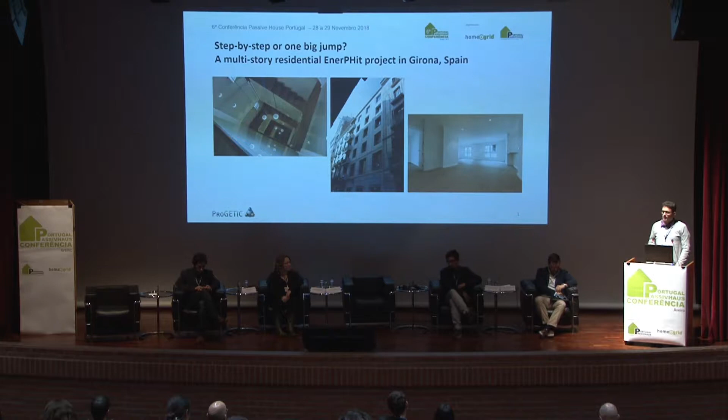It's great to be in Portugal and share experiences about Passivhaus and low energy building, and it's really good to see. I am a Passivhaus consultant living and working in Barcelona.

I set up an engineering company there 8 years ago, and people said to me, 'You're crazy. You want to start working in the construction sector in the middle of a huge economic crisis in the worst sector of the economy possible, and you want to do Passivhaus?' People said, 'You're crazy.' But we kept working, and we've moved forwards, and I would say 85% of our work is related to Passivhaus or low energy buildings.

So it can be done. It's like Germán said, there's no reason not to do this. It can be done, and it's economically viable, and it's technically viable.

So I just wanted to present a small project that we were involved with as Passivhaus consultants, which was an EnerPHit retrofit project in Girona in Spain, just north of Barcelona.

A little bit along the lines of Germán's question: in Spain, why would you bother with Passivhaus? You know, it's all sunshine, it's basically quite warm, there's beaches. You could probably say the same about Portugal. You've got a temperate maritime climate. Why bother with all of this?

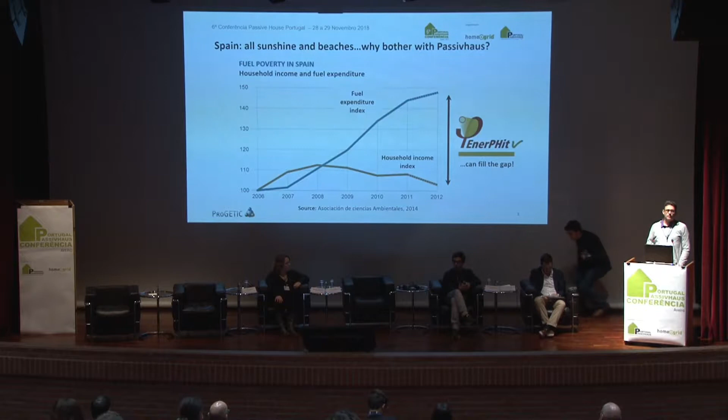Well, there's lots of reasons to bother with Passivhaus, but one of these is, in Spain for example, since the economic crisis, average household income has decreased, and fuel expenditure has increased. So that's giving rise to a situation of fuel poverty, which is a feature in a lot of European countries. EnerPHit can help fill that gap, because as people's net earnings decrease and their energy expenditure goes up, savings have to be made, and EnerPHit can help with that.

Ironically in Spain, some of the highest levels of fuel poverty are in the hottest parts of the country. That's Andalusia: 16.58% of families can't keep the right temperature in their home. In Catalonia, where the project is, it's at 9%. And then the Canary Islands, which is the happiest climate you could probably find, there's still 15% of families who can't keep their homes at the correct temperature.

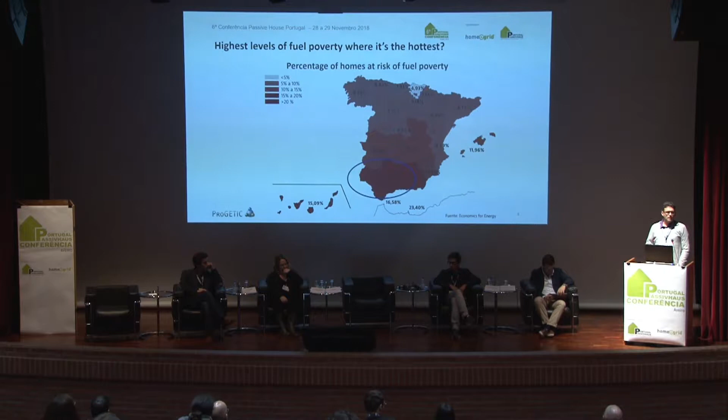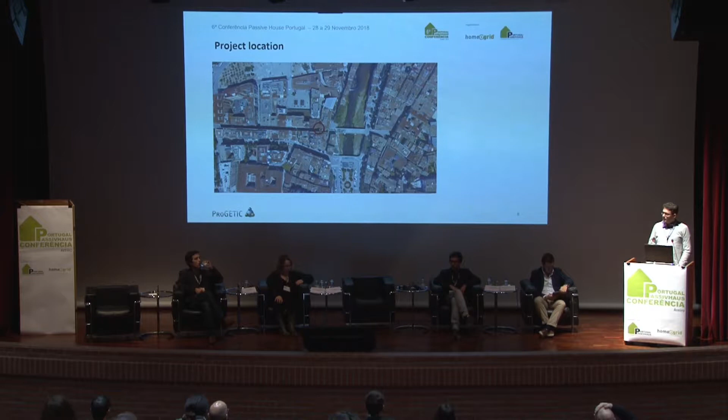So this is one of the many reasons, I think, for doing a proper, deep energy retrofit of existing buildings with Passivhaus. The project I'm going to present is not social housing at all, it's more high-end flats, but it's located in Girona, in the northeast of Spain, about 60 kilometers inland, and the project itself is located in the city center of the old town.

So just to run through the project: it was certified as Passivhaus EnerPHit with the demand method as a pilot project. The original building was built in 1978, about 1,000 square meters of gross floor area. The specific build cost of the whole job was around 1,185 euros per square meter, so not exactly cheap.

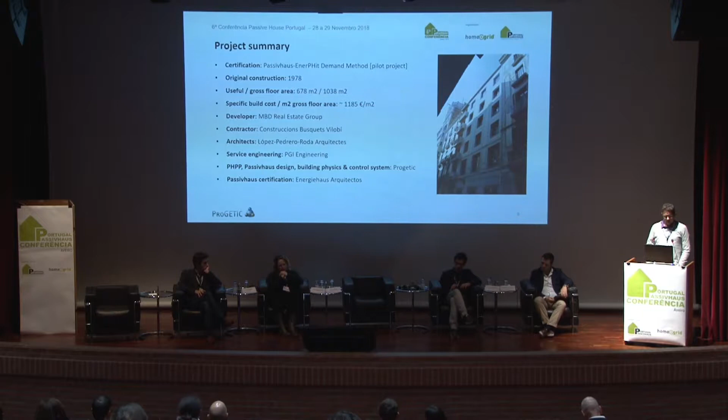The developer is a local developer who decided to opt for Passivhaus and took the step to do this project. The architects were based in Barcelona, service engineering by PGI Engineering. We were responsible for the PHPP Passivhaus design and building physics and the control system, and the certification was done by Energiehaus Arquitectos. The build took a year, began in August 2016, and was finished in 2017.

So I'll just run through some of the details of the project. Before that, just briefly: EnerPHit offers us two different ways to get to certification. One is the energy demand method, and the other is the component method.

I'm sure a lot of you already know this, but to summarize: the energy demand method is very similar to Passivhaus Classic, so it's a performance-based certification where you have to meet the limiting space heating and cooling demands. It's more demanding, and it's probably more advisable where you can use large amounts of insulation on an existing building without causing risk from moisture damage.

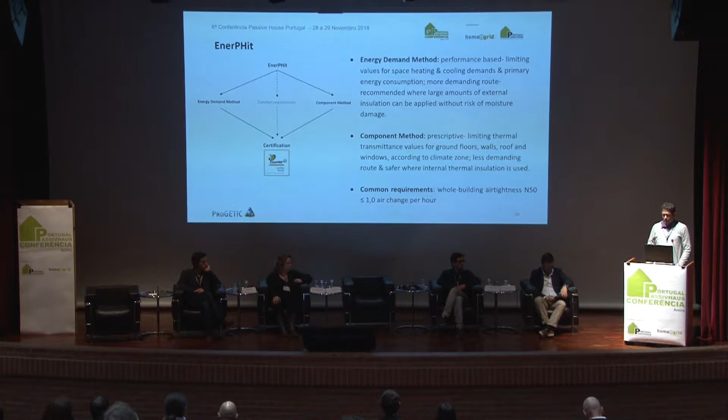If that's not possible, the component method is the alternative, where you have to meet limiting U values. It's less demanding, but it's also safer if you have to do an internal insulation system. And of course there's common requirements, which is the 1 air change per hour at 50 pascals, which needed to be met either way. So in this project we went via the energy demand method.

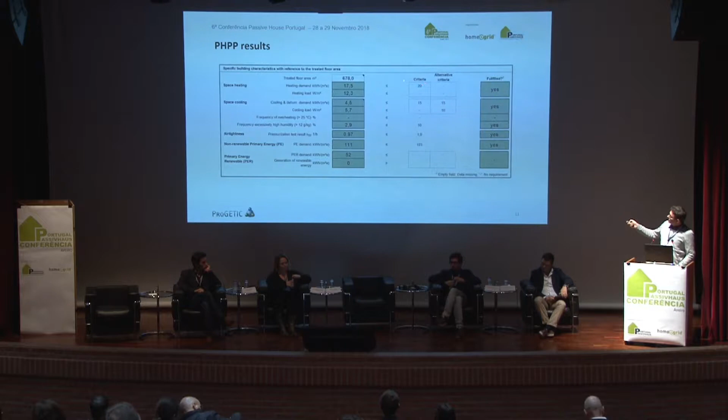These are the results of the PHPP. So for the Girona climate, we had a heating limiting demand of 20, cooling of 15, and the air tightness of 1.

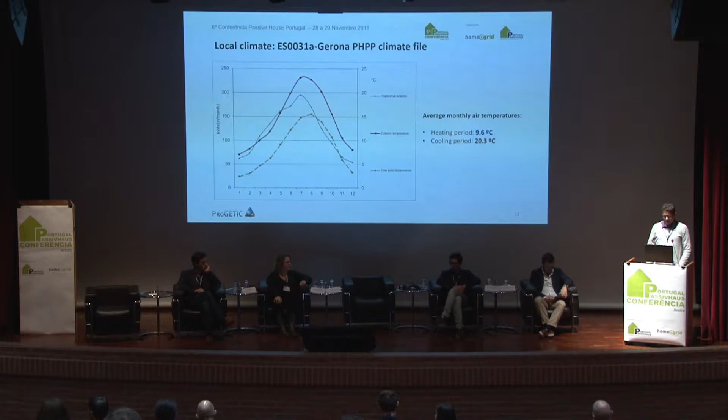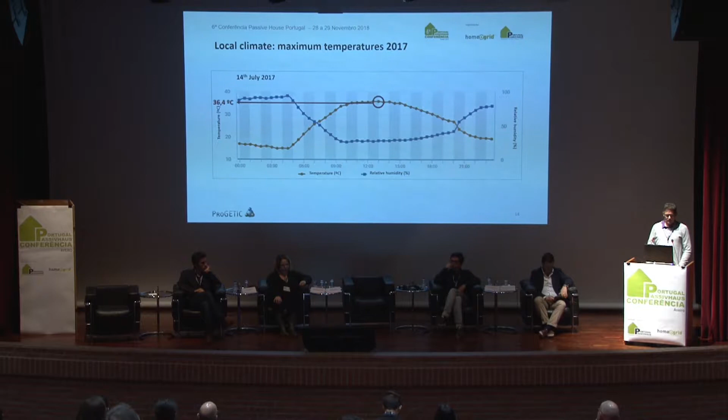If we look at the local climate, these are the average monthly temperatures. We've got about a 10-degree average during the heating period and around 20 degrees in summer. So on the average monthly data, it doesn't look too extreme. However, if we look at the absolute minimums and maximums, it does get quite cool - minus 8 in January 2017, and up to 36 degrees in July of last year. So it can get quite cool and quite warm.

Some information on the existing building. In the image on the left is the main facade that's south-facing. There's a load-bearing ceramic extruded brick wall of 29 centimeters with cement render on the outside and gypsum plaster on the inside.

The internal floors are terrazzo over concrete beam and block. And we couldn't insulate on the outside at all - that was not permitted by the local legislation.

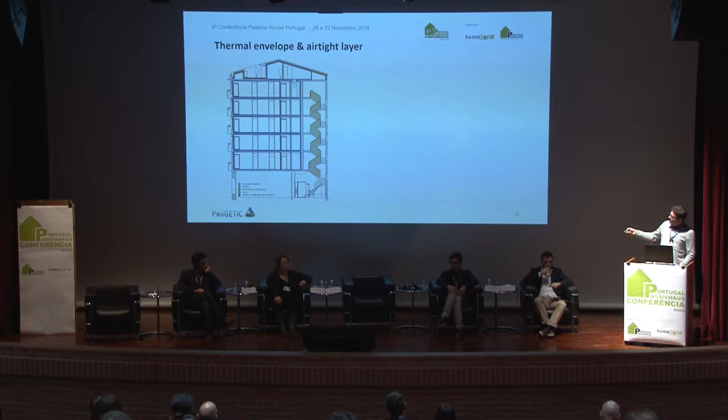So what were the initial proposals for the thermal envelope and airtight layer? Because there was a commercial premises on the ground floor - this is actually a bank - the stairwell was left out of the thermal envelope and airtight layer, and the thermal envelope was therefore done on a per floor basis. You can see on this floor plan the thermal envelope line.

Obviously, it's preferable to do the whole building if you can. In our case, we couldn't because the commercial premises was not part of the building itself.

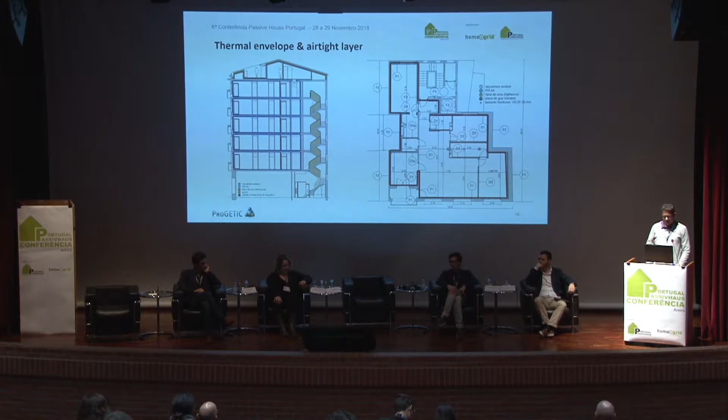What did we do? We applied an internal insulation system which needed to get the U-value from 1.45 down to 0.19. We did that using 80 mil of PIR insulation boards, which were dab and dot bonded to the existing wall, with 48 mil of mineral wool insulation between metal studs and gypsum plasterboard.

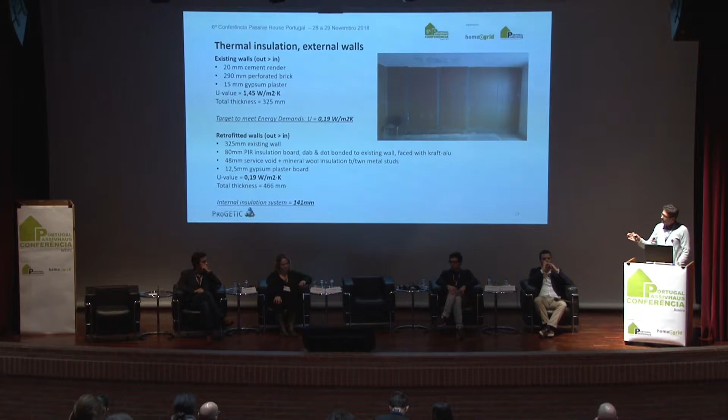This was not what we as consultants wanted to do originally, but the worry of the developer was to minimize the amount of floor space that was going to be lost with the internal insulation system. So we had to go towards very low thermal conductivity insulation like PIR boards, which personally is not a kind of material I would prefer to work with, but this was the solution we ended up working with. It took 14 centimeters to do the whole internal insulation system.

On the roof, it was newly built with a timber structure using 60 mil of wood fiber insulation with a radiant barrier, which you can see here, to reduce heat gains in summer. Clay tiles, 140 mil of blown wood fiber insulation, on top of 12 centimeters of cross-laminated timber. So we had a well-insulated roof to keep the heat out in summer and in winter as well.

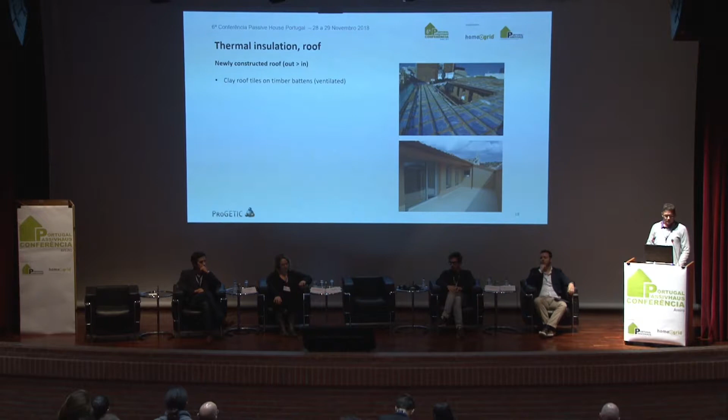Some of the thermal bridge detailing. Obviously one of the difficulties in retrofit, if you can't insulate on the outside of the building, is how to resolve intermediate floor and wall junctions. They can't be resolved perfectly thermally, of course, but what we decided to do was...

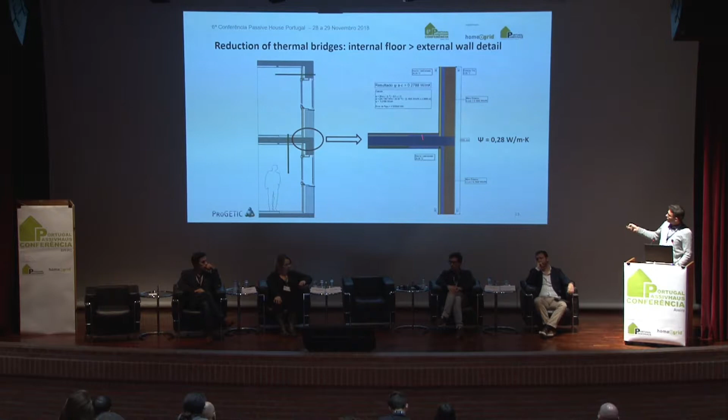...cut out 1.5 meters of the floor and insert insulation on the floor and on the ceiling. That way, the psi value is still quite high, but we managed to bring the minimum surface temperatures up to avoid problems with condensation and mold growth.

As you can see here, this purple material is the insulation, and it brings the minimum temperature up to about 16.5 degrees - quite a way above the 13.2 degrees, which is the limit for mold growth. So you can see some images of that detail here.

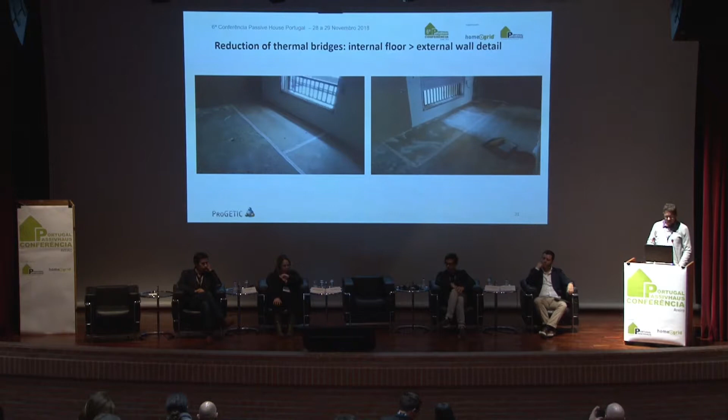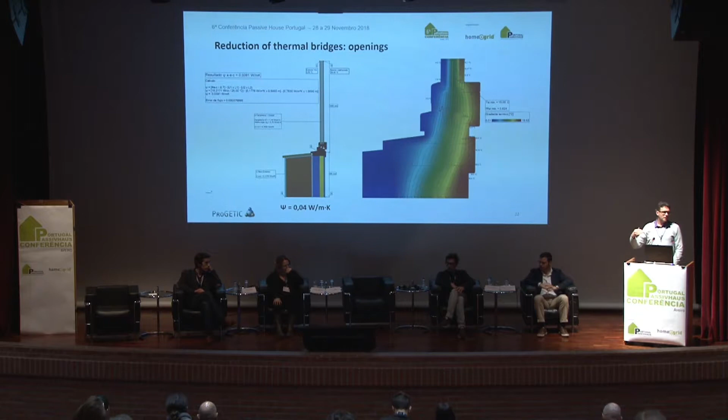The floors were cut out, and all of the external walls had these strips of insulation inserted. For windows, we did a detail of fixing the windows in the insulation layer, on the internal insulation layer, which is a good solution for warmer climates too, because if the window itself is on the inside of the opening, you get more shading from the opening itself.

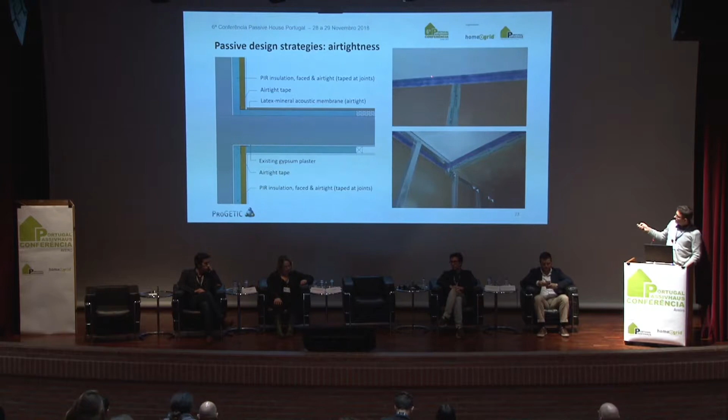Air tightness: we used the PIR boards for the airtight layer on the walls. They were taped to the existing plaster on the ceilings, and taped between boards. On the floors, we taped them to an acoustic membrane, which was already in the design anyway. So that's what we used for air tightness - the PIR boards, existing plaster, and a latex membrane on the floors.

The air tightness gave us a lot of headaches. It was a really good learning experience. One example of how not to do it is what you can see here - this was a cable that was going out to the motors for the blinds. Of course, the subcontractor who came to install these was not in any of the original meetings, so he didn't know what air tightness was all about.

He didn't know anything about what you needed to avoid, so he just drilled a hole through these things and stuck his cable in and left, happy with the job done - until we came to do the blower door test, and of course we saw all these holes. They had to be taped up, and you can never get a really good tape seal like that. These are things you learn doing all of these projects.

One other problem we found with the air tightness was that one of the flats was sold and the client wanted to move one of the bathrooms. So the drain pipes were then moved.

We couldn't see when we did the final blower door test if that had been well sealed or not - these are all things you learn doing these projects. The windows were taped from the PIR boards across the pre-frame onto the fixed frame.

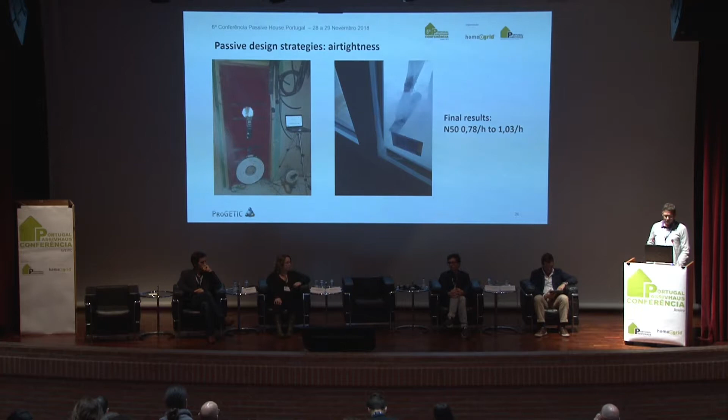Blower door test gave us results of between 0.78 and 1.03. On the lowest floor, we actually had to ring up the bank on the ground floor and ask if they could let us into the vault where they keep all the gold and money, because we had to see if there was a leak. We had a result of 1.2, and there was a leak which we had to inspect. We didn't manage to take anything with us from the vault, but we did manage to get the final result down to 1. So that was air tightness.

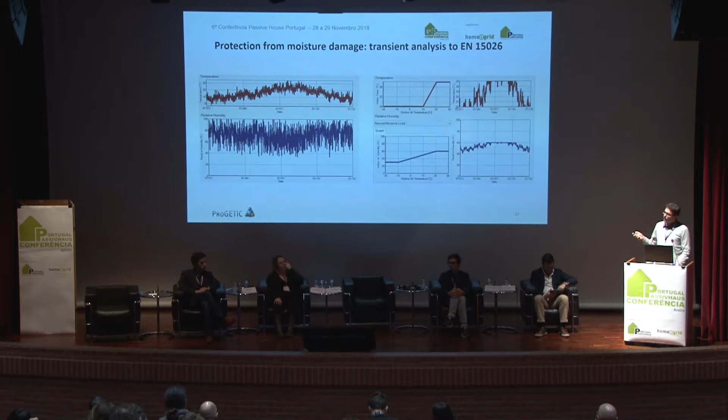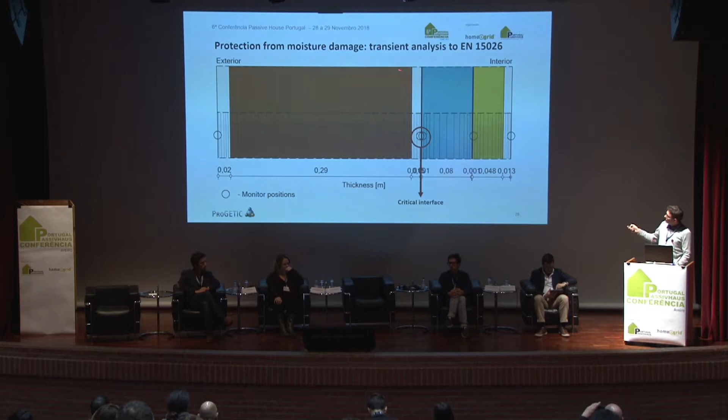Another thing we looked at in the design phase was transient dynamic hygrothermal modeling, to make sure we didn't have a risk of moisture and mold growth with the internal insulation system. Using the WUFI calculation program, we ran simulations of the internal insulation system, looking at the relative humidity at the critical interfaces - cement plaster, ceramic brick, gypsum plaster, insulation, and plasterboard. Running these simulations, we could see the relative humidity over a 10-year period at the critical interface, which gave us an indication that the internal insulation system would be safe.

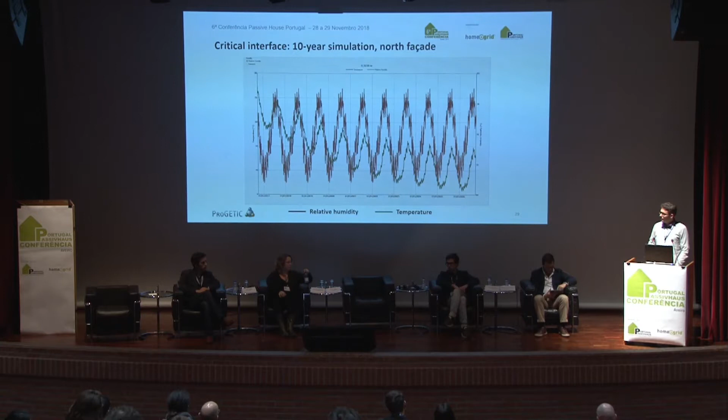It's very important in these cases - if you don't have an external render to keep rain and driving rain out, you have to be much more careful with what kind of insulation you use on the inside. Go for a vapor open strategy, and probably go for the component method rather than the demand method.

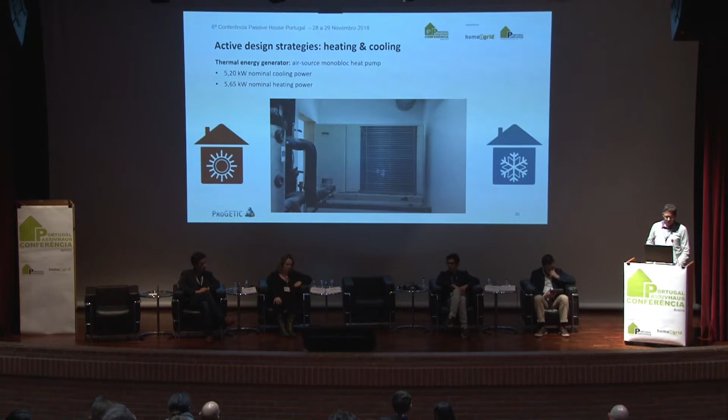In terms of active systems, we had a per-flat heating and cooling system which included the following: a thermal generator, an air source heat pump with about 5 kilowatts of heating and cooling power, feeding a post heater and cooler battery on the ventilation system, with insulated ventilation ducts taking warm or cool air into each room.

This was combined with radiant ceiling panels - we couldn't use underfloor heating because there wasn't enough floor space, and we couldn't use fan coils or split units because there wasn't enough space either. So the option we decided on was that most of the cooling and heating power is done by the battery, with the remaining power provided by the radiant ceiling panels.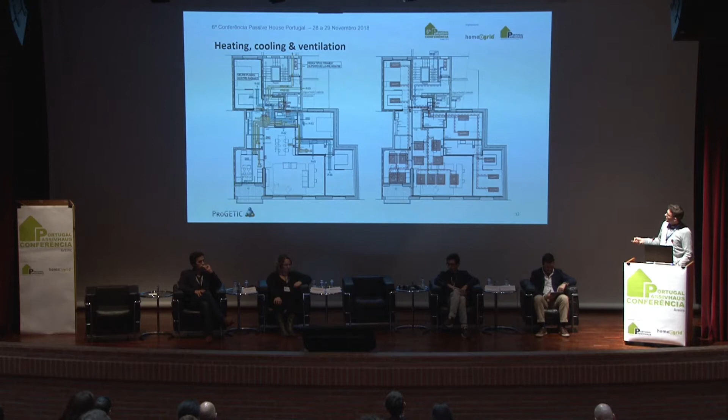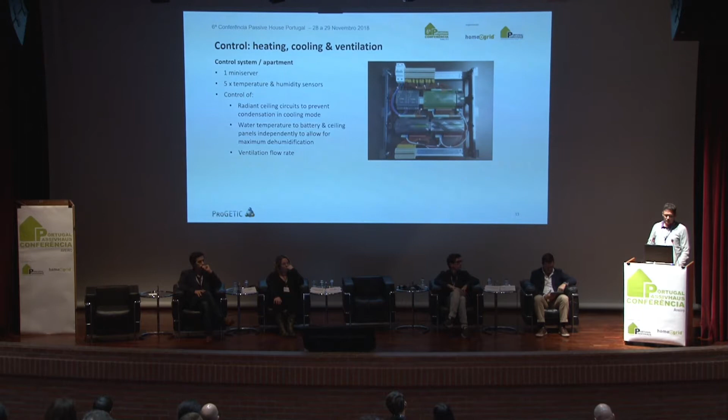All of that was controlled by a control system which includes a mini server and different temperature and humidity sensors in each room. That way we could differentiate between the temperature going to the radiant ceiling panels and to the heating and cooling battery, allowing us to dehumidify as needed in the summer and modify the ventilation flow rate. All of that controlled via a tablet on the wall or a mobile phone.

This is all very nice, it's all very sexy, it looks very cool, and it works very well. But of course, there were 2 people who bought one of the flats who were retired. When they saw all of these phone things and applications, they were like, we don't understand any of this, and they got quite upset.

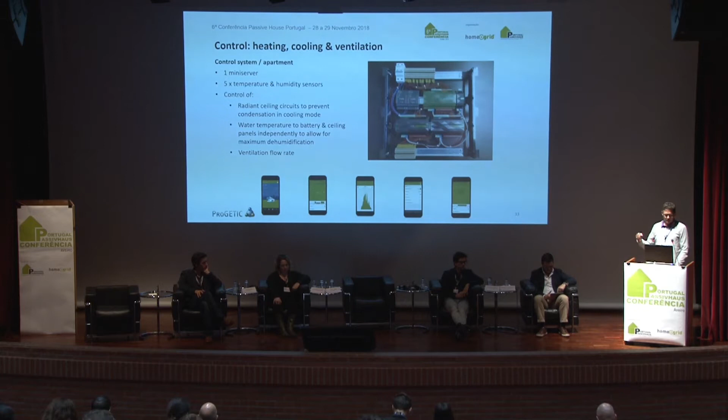So that's obviously one of the important lessons we learned from the project - keep it simple. You can use all of this, and these systems are very useful to monitor and do preventative maintenance on a system, but the interface can be different. You can interface just with a conventional thermostat and still use these systems, so it's as simple as possible for people. That's important because I think when people move into a passive house, if there are problems, they sometimes are more likely to point the finger at passive house. So the simpler it is, the better - and I think that's true in any kind of building, but especially in passive house.

Comments from a lot of the occupants is the silence is amazing because they're right in the city centre of Girona, so there's lots of noise from bars and restaurants. Silence is amazing, it's very comfortable. People are generally happy. There's been some difficulties in terms of people getting used to not having a big cooker hood - one couple forgot to turn on their cooker hood, so they started complaining about smells. All the normal things you'll find in any kind of project.

But I think one of the things we've learned is the handover needs to be good. There needs to be good information going to the users so that they know how to use the building and run the building.

So just to summarize some of the conclusions and the lessons learned - I think this applies everywhere.

Be clever and keep it simple. All of us who work in passive house, we love going into detail - lots of numbers and graphs and details. But the simpler it is, the better. And I think Germán summarized that really well in his presentation, and Lloyd was commenting along similar lines this morning.

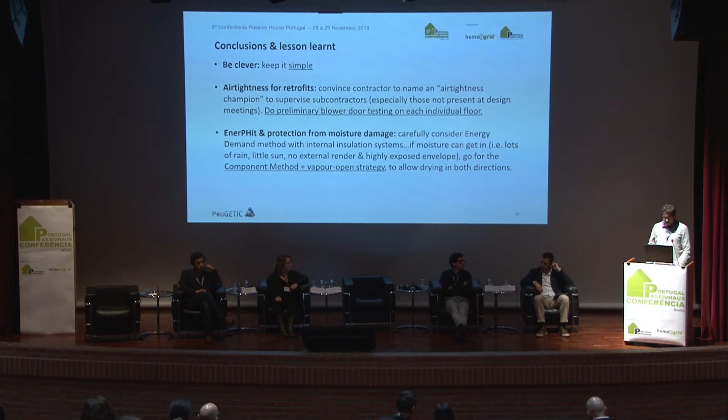I think it's also preferable to separate heating and cooling from the ventilation system. You could put the heater and cooler battery on the ventilation system, which is a classic passive house solution, but it can create problems with noise. It can create low relative humidity in the winter if the air change rate is too high, and it means you don't have local control over each zone. So I think it's probably preferable to separate them.

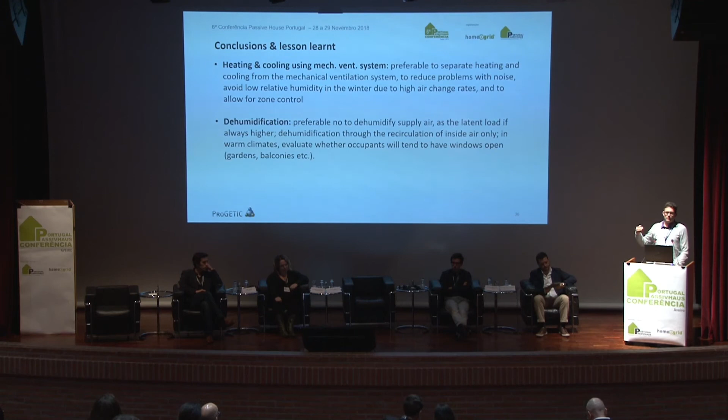Dehumidification is best done internally only. We had the cooling battery on the outdoor air supply, so of course you're dehumidifying outdoor air which has more moisture in it. It makes much more sense to dehumidify by recirculating indoor air. So that's an important conclusion.

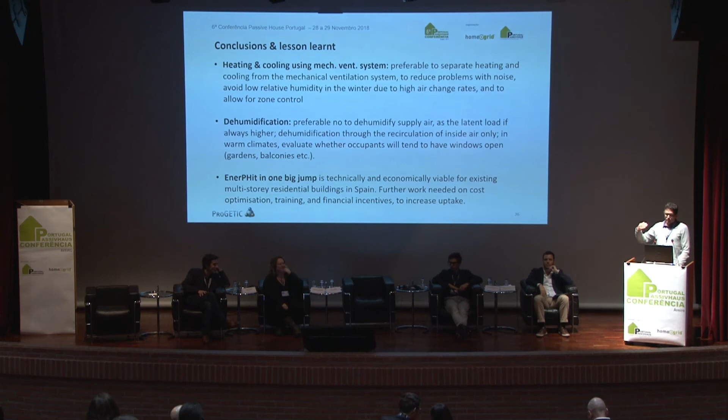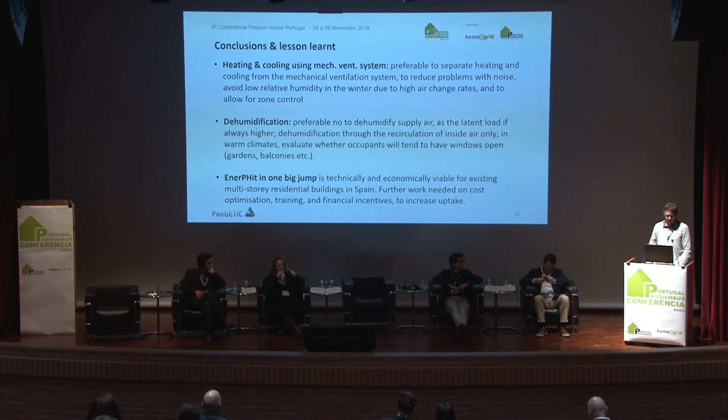Basically, I think what we've learned from the project is that EnerPHit can be done in one big jump. I think it's technically and economically viable for existing buildings in Spain, and I'm sure that's the case here in Portugal too. Of course, we need to work further to optimize all of these solutions, reduce costs, help training, influence the administration to provide financial incentives, and so on for the uptake to be increased. More than anything else, the great thing about EnerPHit and passive houses is that it's a team sport - everybody's involved, down to the guy who's just taping tapes on site. So that's, I think, one of the most positive things about all of this.